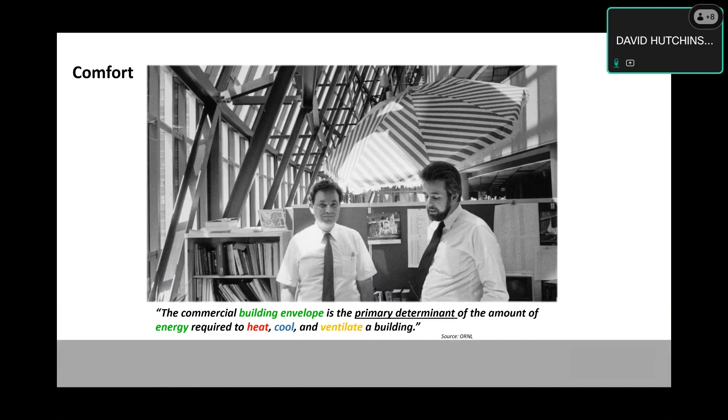So to get started, I think for us, there is a little bit of backstory. The envelope is obviously a big portion of this. And for those on the call, I think this is no secret. But one of the things that we have found through the process is that we had to be really smart about how we approach the envelope and what solutions we brought to it. And for us, it really started with what type of solution did we want to bring to market? For those that don't know Tremco, I'll give a little bit further backstory on it.

We had 2 approaches. Did we focus on the light, simpler retrofits, lights, controls, new motors, short ROI? That was a big thing that people were interested in: how do we make sure that the benefits of this solution were met quickly with ROI? And we found quickly, when you start with the envelope, that is not the case. So we did dive full into this.

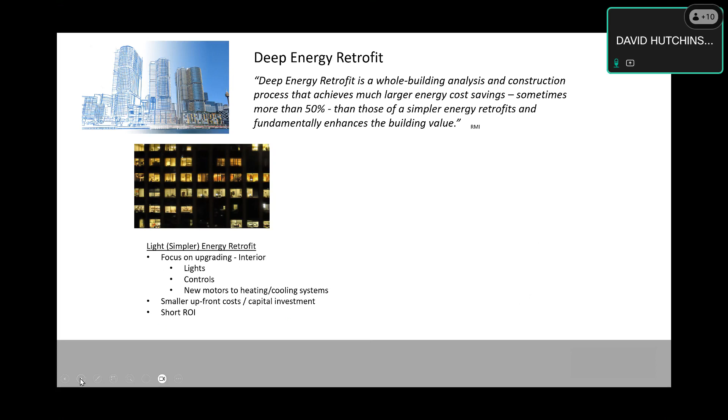And for those that know much about Tremco, we've been in panelization for a long time, but it has been primarily through our Dryvit subsidiary and primarily through new construction. So when we came into this, we thought about windows and the building envelope, which were 2 areas that we understood greatly. And what can we do to have the biggest support system for buildings that are trying to retrofit and meet a lot of the goals that are now upon us?

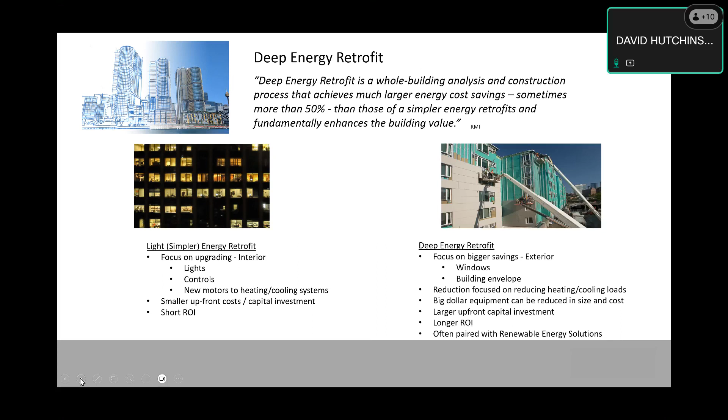So when you look at Tremco overall, between the glazing side of the business, the roofing, the building performance, and the joints and sealants, we felt we had a really good grasp on how to tighten up the envelope, reduce energy consumption in the building, but also build in certain types of integration tools that allowed us to do this in a quicker, more meaningful fashion that also was beneficial to building owners, designers, and subcontractors alike.

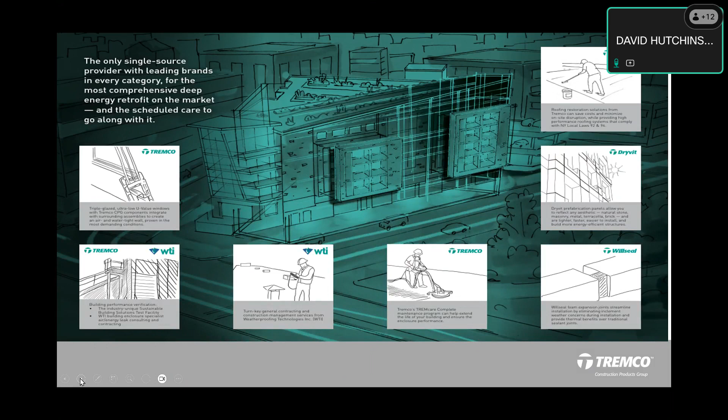The other thing we noticed was there was obviously a huge push for clean energy in the form of photovoltaics and others to give back energy. When we're talking about net zero and carbon reductions, they were a big portion of it. But as we all know on this call, if we don't do anything about the envelope, a lot of those solutions are going to fall short of our ultimate goals and also are going to cost us long term.

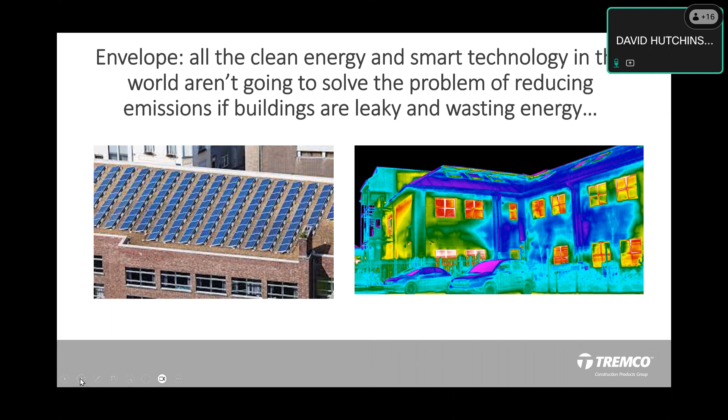So we want to make sure that we address what we thought was the biggest issue and the most complicated issue. And for those that have done previous pilots or attempted to, I'm sure you'll agree that the envelope presents some of the most complicated things. And I'm going to go through several of the reasons why, but most importantly, several of the solutions that we've come about as a result of it.

So offsite construction is something that has become obviously more prevalent through modular building. But for our purposes, we're talking about panelization. We understood that compression of the construction schedule was a huge part, both from a cost standpoint, but also when you're talking about zones 4 and 5 in the Northeast with a weather standpoint, we needed to make sure that we could do a lot of the products offsite in manufacturing facilities. Enclose the building envelope more quickly, extend the construction season, eliminate cost of scaffolding, other tenting.

Someone might want to mute their mic on that. Whoever's got a phone, thank you.

Address skilled labor shortages, and then a big one for us was assure quality control performance. When you're talking about the measurement that's required for a lot of these buildings and the costs associated with not performing up to the standard, we could not have these solutions be not great in the field. They had to come up basically perfect. And I'll have Mike touch on some of the ways that we've done that currently, but this is a big part of it, is making sure the quality control and performance met the standard that's required.

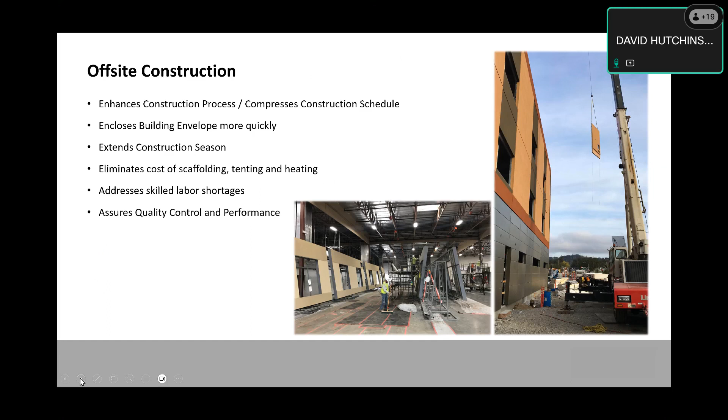This is just one example of how manufacturing and offsite solutions have helped speed up this process. Building in these controlled settings at floor height, where we have ability to bring labor from the outside inside, but also create a solution, and you will see foam being sandwiched in a proprietary product to allow us to have no thermal bridges in our solution that reach the building. And this is just stage one for us, which was, what is the panel solution that is going to make both the solution correct, but also allow designers to design the way they need to for long-term performance.

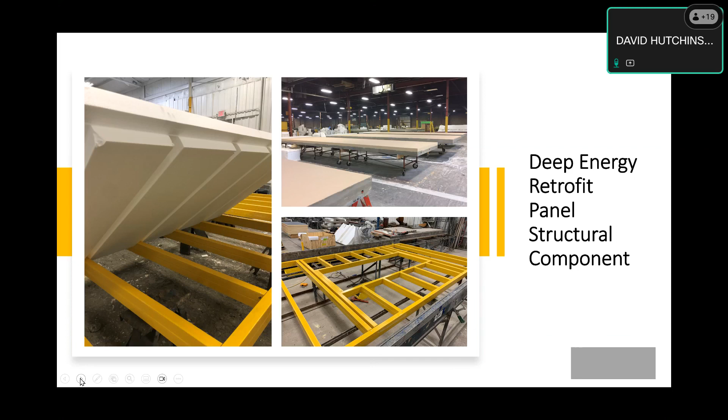After that, while leading with the envelope, the biggest thing was, how do we start pairing it with the other two things, or the major things that are happening: energy audits and physical needs assessment. When an owner starts this process, how early can we be engaged to make sure, again, integrated solutions are done and we are not backtracking or reworking these solutions later on? Local Law 11, capital costs result in avoiding business as usual expenditures. How do we make sure that when we're talking about performance, we're also talking about tightening the envelope, we're also talking about laws and costs that owners are taking into effect?

Life cycle costs versus first costs. This is a big point of contention, I know, for building owners, is the return on investment. How do we bring solutions to the table that put all that capital up front and reduce those costs in the back end to make this a more financially viable solution for everybody? And then again, reducing the size of mechanical at the outset. We don't want to be creating solutions now that have to be fixed later, or overspending at the front part of this. We want to make sure our solution makes sense from day one as well as day 50 afterwards.

One of the biggest things we saw was typology. When we're investigating how we were going to integrate our solutions into the buildings, we were looking at 4 to 7 story masonry buildings that look pretty simple at the front end. We'll talk about why that's not always the case, but do we have areas for staging, access, and repeatable design? And a big part of that is, can we do it without displacing the tenant? And for us, that was an important part of this solution, was how do we continue to integrate more things into our panel design that allows us to not have to come back and displace that tenant or extend the amount of time that they're inconvenienced in their home.

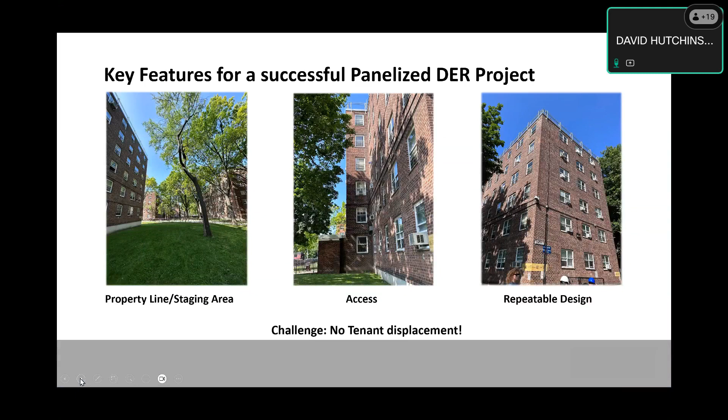And this was the process. This is the flywheel of a standard DER process, which is cumbersome to look at, let alone to actually work. So starting at the energy analysis and energy modeling all the way to the long-term performance and maintenance, there are a lot of touch points in this process that are great collaborators, but this can be where a lot of the cost increases, but also where the design solution can continually find ways to stumble. And we wanted to make sure we reduced that, or at least consolidated a lot of these spokes of the wheel to make sure our process made more sense to everybody that was involved.

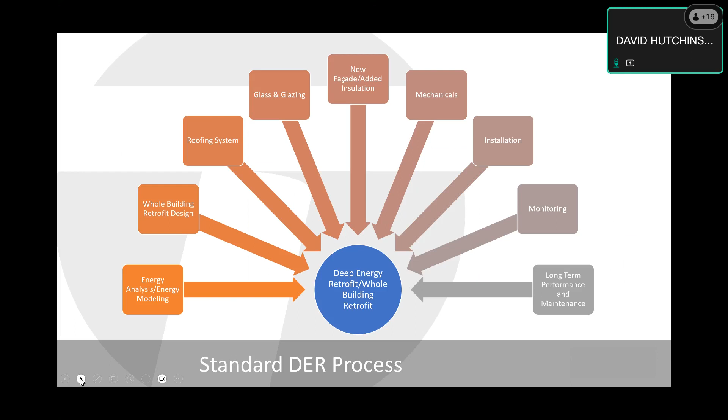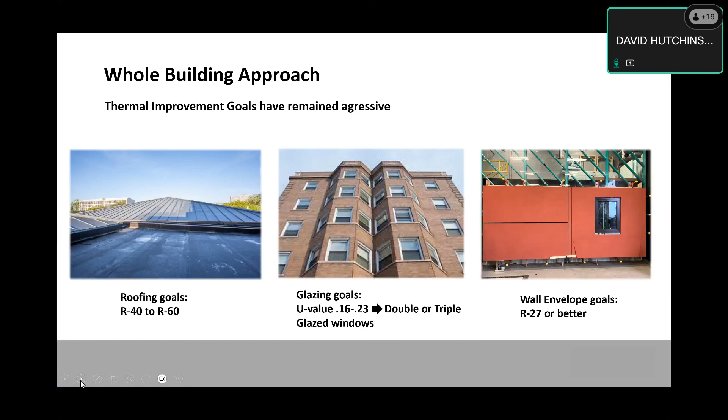The other part of it was creating solutions for future problems. The whole building approach. How do we meet these goals of the roof, glazing goals, the envelope goals? How do we make sure all those are working collaboratively and not working in spite of each other? Because if we focused on one aspect of this and then we oversize the other aspect of this, we are uselessly wasting money. And how do we make sure that this solution continues to compress to create the solutions we want, but also makes sense to the owner and design team?

Multiple building typologies is the big one. We cannot have a one size fits all. It just doesn't work in this climate. The workforce training behind the need. How do we make a solution that is actually simple and easy for new contractors, new subcontractors to install? And can we, again, combine the workforce to doing one solution at one time?

Installation was a big one. How do we simplify it? How do we use the existing structures we have to create solutions that make sense and are easily done? And we have my colleague, Mike, online. I don't know, Mike, if you want to add anything to this installation process to talk about what made sense to make it easier to use and easier to work with.

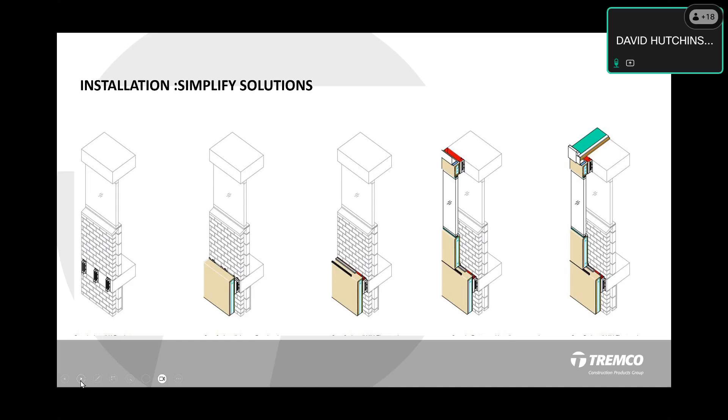Yeah, I mean, we had to come up with an installation process that was simple to use, but also flexible to use on a variety of different building designs and conditions. So, and we're going to get more into the weeds on the different panel solutions we have, but we were able to come up with a variety of different panel types and installation details that can accommodate just about any building facade that's out there right now, but also open up the labor force to a bigger selection of contractors who are able to actually install these panels. So taking something that was traditionally done by plastering contractors and opening up to different trades who can install these panel systems.

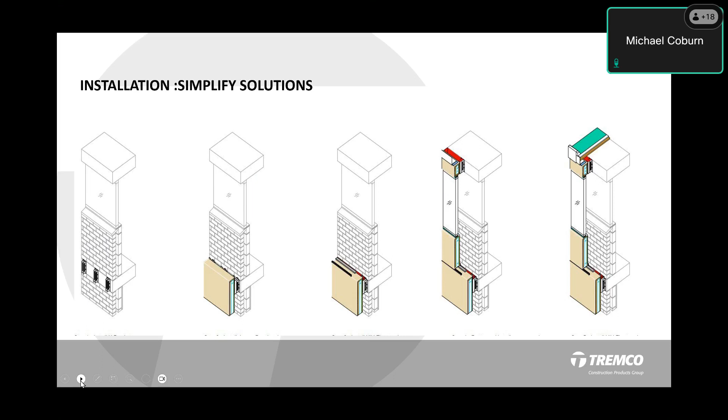And again, using terminology and using systems that people understand. How do we make sure these joints are easy to work with? How do we make sure the attachment is easy to work with? We will not get into the weeds on this because this is design stuff, but when we talk about simplification of process, this was a big part of it.

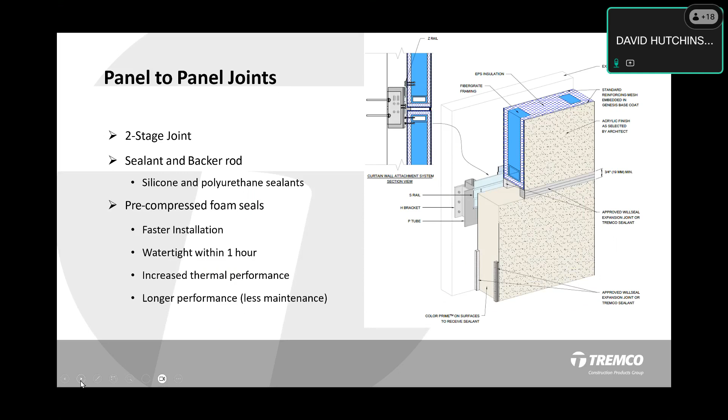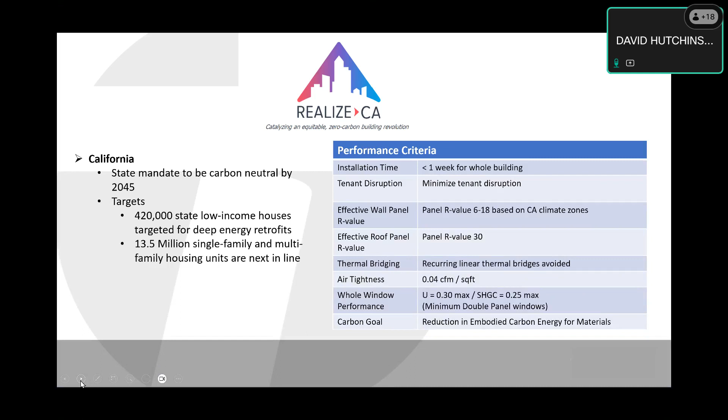Multiple typologies. One example is our work in California. That is a completely different typology than what we're used to seeing in the Northeast. So how do we look at these solutions and these types of buildings to maintain the same goals that we have across the country, but make sure our solutions mirror? So an example is a hybrid panel approach. And I'm going to have Mike talk a little bit more about the hybrid panel approach we bring to the table.

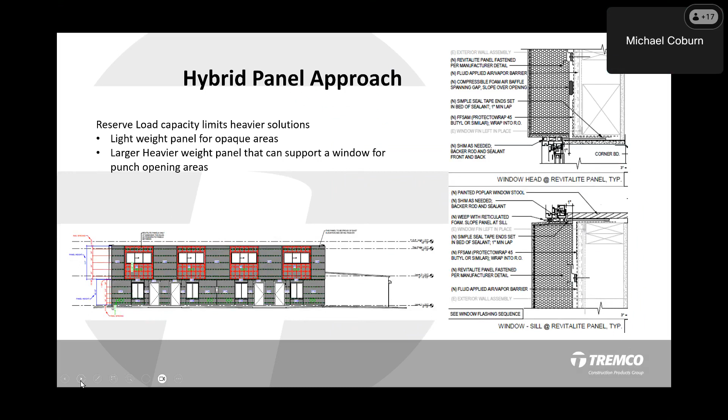Yeah, and part of the value engineering process is making sure we're coming up with the most economical solution that solves all of the requirements for these specific buildings. So we were able to come up with a variety of CI panels that give the continuous insulation without any thermal breaks in the exterior facade. So we have lighter weight panels for your flatter areas, for the opaque areas, for areas where you don't have to carry any loads and windows, things like that.

But then we also have a heavier panel, which is our Revitalite panel, which uses a proprietary framing system so that there's no thermal breaks, but it's able to carry the load of the windows. And with this panel, we're able to offer even a variety of solutions. So if you need a cavity space between the existing facade and the new facade, we're able to provide a cavity space where you can run electrical, where you can run HVAC, different systems behind our panel without any or minimal tenant disruption.

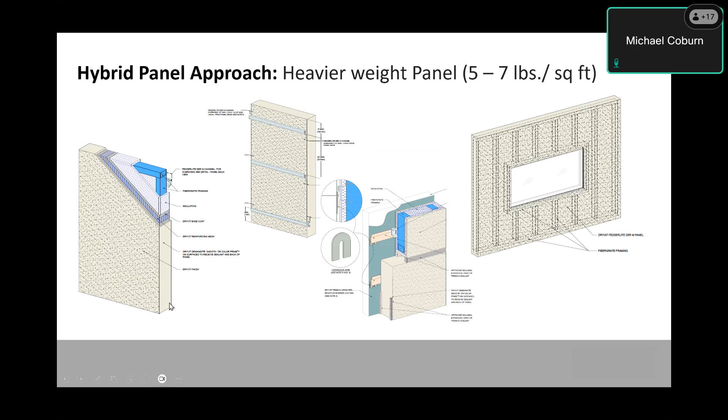So this is the example. Oh, sorry, go ahead, Mike, please. No, yeah, I was just going the same way.

So we were able to come up with a hybrid approach with different types of panels to meet the specific needs, but still come in within budget. So you can see there we have a Revitalite panel that's flush mounted to the wall. There wasn't any need for a cavity on this project, but we were able to incorporate the window into the panel. So that way there was minimal tenant disruption.

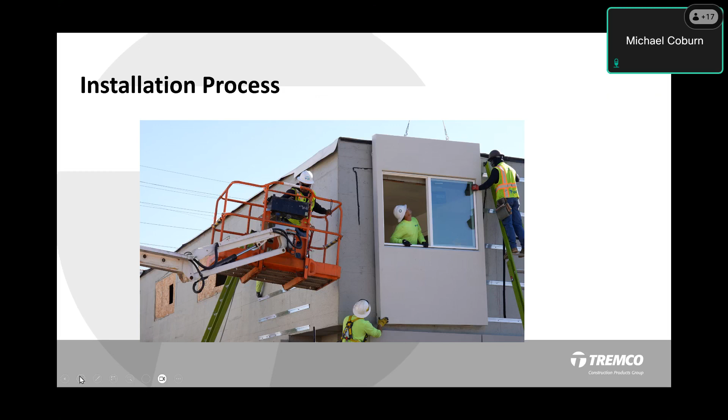The new panel was put up with the window in, and all that was required was to demo the existing window and then tie it into the new panel system. So that's a Revitalite panel, but on areas where we didn't need to carry a load, we were actually able to use a continuous insulation panel, our Fedderlite M system, which is a lightweight CI panel

So we've solved one problem through this process, right? Like, how do we look at the different typologies, come up with solutions through what Mike was saying, a hybrid approach to make sure that we have the right standards and energy performance, but also something that the contractors can wrap their heads around and design for, right? So we wanted to make sure that we did that.

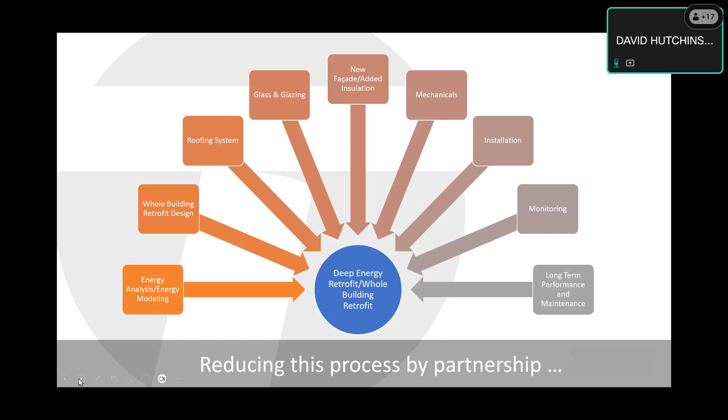So now we've reduced that process by allowing the window to be integrated into the panel solution and the contractor. We have one contractor on site doing all the work, right? So this flywheel, again, has started to reduce and get more and more condensed. The next part of that was, how do we do things with integrated solutions, right? One of the big things that's on the masthead of this presentation is HVAC. How do we make sure that our panel solution can combine another important task into this wall solution?

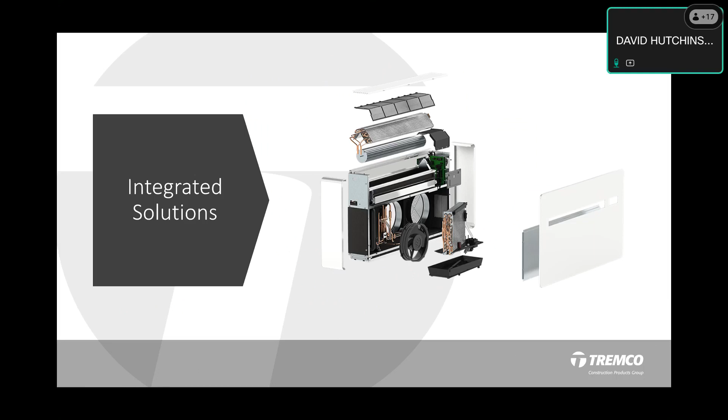And one of the things that Mike alluded to before was this slide right here. Mike, I don't know if there's anything else you want to add to demonstrating what's on this page, but how do we solve a problem within our panel that allows us to do things with the mechanical and the HVAC?

So we've come up with a panel and an attachment system that's going to give you a continuous insulation facade that's going to give you R values up to 27 or higher, depending on the panel design, but still create a cavity where you can do a lot of the energy retrofit for your HVAC system, electrical system, kind of whatever you need on the exterior of the building. This is going to minimize any tenant disruption.

So for instance, on this project, you can see here, they were able to run all their ducting, plumbing, and any mechanicals that they needed on the exterior of the building. And then our panel system was mounted with a 6-inch cavity. So it overclads all of this new system. And we're actually able to incorporate different parts of that system into our panel design.

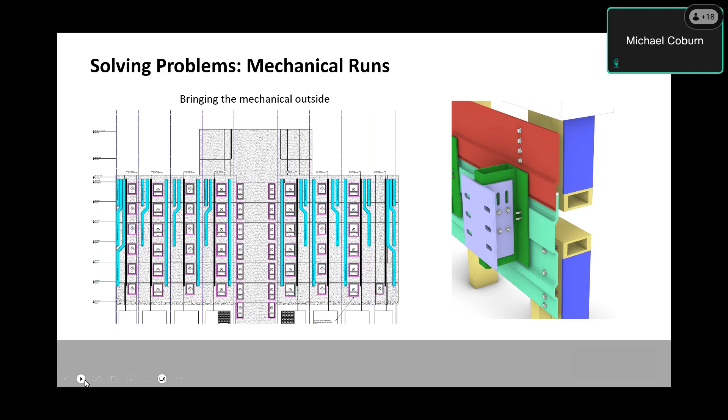Excellent, thank you. So as we said, we wanted to keep staging and improving what we're doing. So then it became partnerships. And for those in this call that are familiar with Hydronic Shell, I'm sure you were, because they've continued to push the envelope, pun intended, on what we're doing to retrofit these existing buildings.

So using design like we showed in that previous slide to allow piping to go down the wall, but also integrate a mechanical system, an HVAC unit, into a panel design. So once again, one stage for this entire process.

So we went from trying to figure out how to field apply EIFS onto a wall, to building it off site, to building it with window in the unit, to building it with piping possibilities and cavity, to building with HVAC. And so it continues to stage into a system that, again, reduces the amount of workforce on site, but also speeds up the process and allows us to design for the long term as opposed to the short term. So we're not coming back and having to figure out how to redo X, Y, or Z in this. This is all leveraging technology as well as some ingenuity in that process.

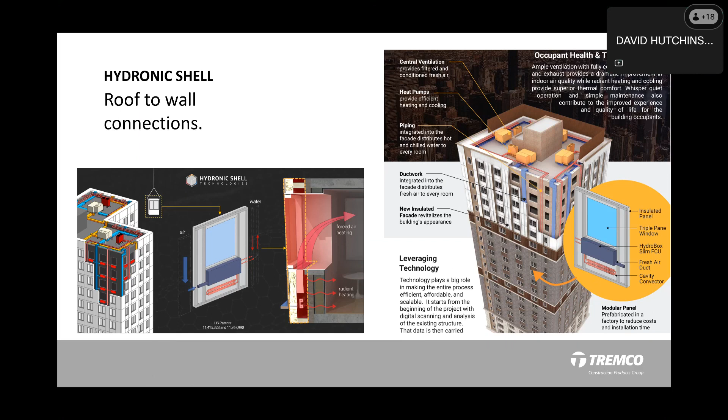And this is just an example. This is a slide that everyone's going to get, so I'm not going to go into depth because I think it's a rough slide to see. But what we're able to do with these systems now is look at our envelope, look at the window assembly, look at the air tightness, look at the HVAC, all as one system, right?

So when we're talking about trying to meet long-term energy performance and also meeting cost standards as well as maintenance standards, which I know is a big concern for building owners, now we're looking at one system for the entire envelope that allows everyone to start thinking about their ROI, their upfront capital costs, their upfront performance. All those things start to get more and more condensed. So as I continue to show you that flywheel, we're continuing to shrink that down so we have a process that's more integrated and more collaborative as we go about it.

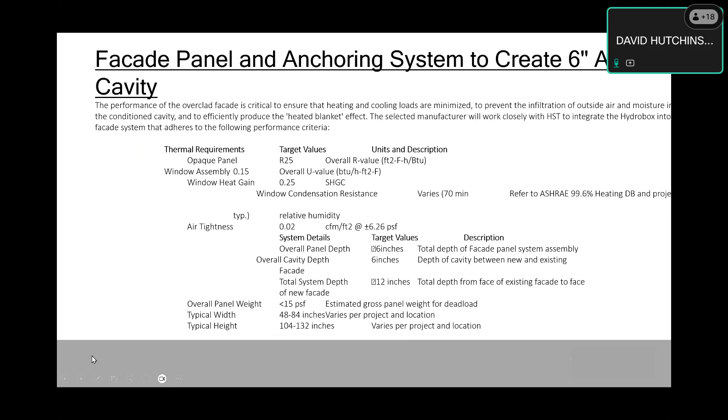And this is the last stage of it, right? The final goal is integrated systems and design on collaborative projects. So this is an example of a project we're currently working on with Cycle Architecture in New York City on 50th Street. And this involves integrated mechanical design, integrated panel design, integrated design intent. And that is something that I've been pushing for for what seems like a decade, as it's really hard to have these solutions without every component, whether it's manufacturing or design team and owner, on the same page on how you are going to bring this solution to an actual building and not have to go back and forth and do the value engineering and all the things.

Yeah, and one of the advantages of Tremco and the solutions we offer is twofold. It's very customizable. We've got a variety of panel systems to meet the specific needs, but we also have the ability to customize different panels to meet different facades, different buildings, things like that. So we have a whole team that includes myself, David, Stephen, and a whole team behind us that's able to come up with panel designs or modifications to existing panels to meet specific needs and integrate different components into our panels. The other advantage is Tremco has a lot of that in house.